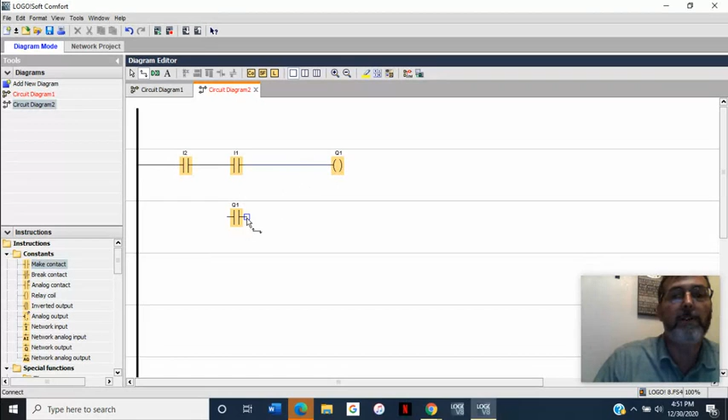All right, so let's do our connections on our wires. We connect it to our hot rail, connect it to our start push button, and then we connect it to our output. And this one down here, we've got to go all the way over here to the right before it'll connect, and then all the way back to the left before it'll connect.

So this is going to be our stop push button right here, our start push button right here, our seal in, which is named the same as the output, because when we energize this output, then we're going to have that alternate path. It's a little bit different than your motor controls, but you'll see what it does here in just a minute.

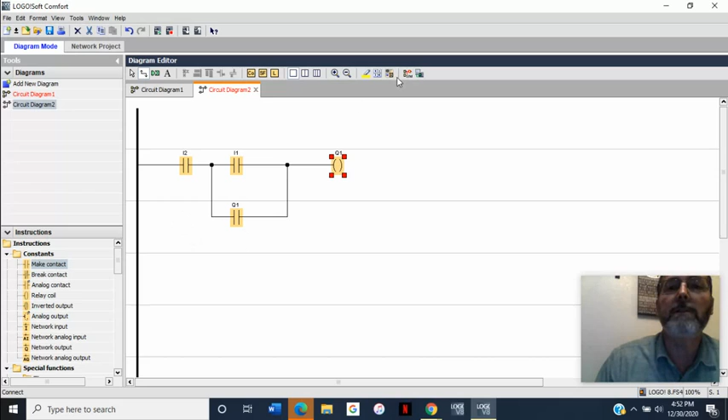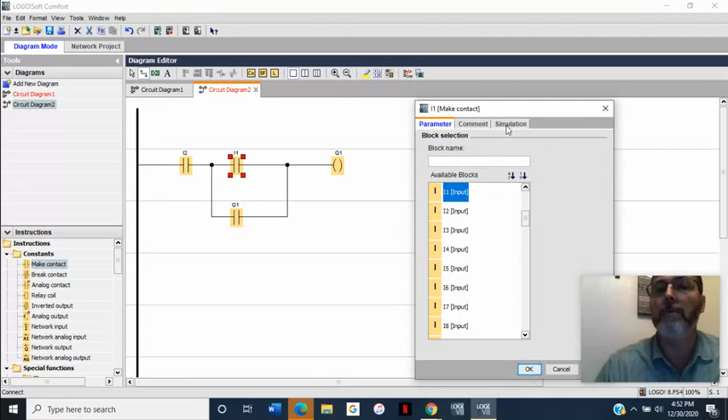I've got to right click, block properties, and on our simulation, this is going to be a momentary push button break right there because it's a stop push button. This one, right click, block properties. It's going to be a momentary push button make, and that just means it's normally open. All right.

And when I simulate it, you can see the red lines that go straight through the stop push button, and then there's nothing past there. But when I push the input 1, it starts it, and even when I release it, it keeps it sealed in because of this Q1 address right here. And we can see that our light is lit. And I push the stop push button, and it takes it out.

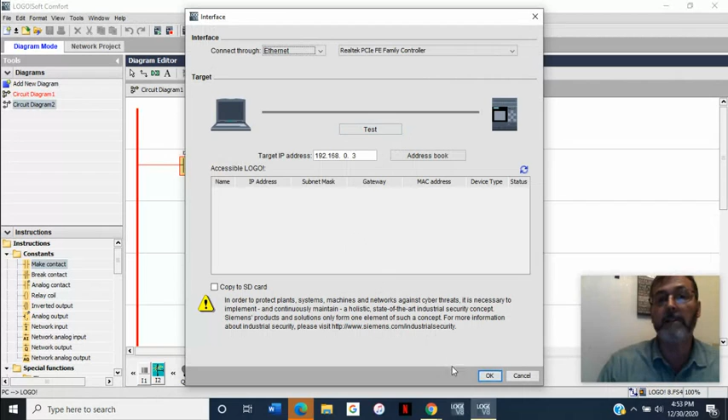I'm going to download this to our PLC. Here we go, PC download, PC to LOGO. I'm going to have to take it off simulate here. Here we go. I'm not going to test it because I already know that the IP address is correct. Click OK. It'll connect to the device.

I'm going to change it to stop mode so that it allows the program to go into the PLC. It's in stop mode. Change to run. Yes, it's already done the transfer. I forgot to turn the simulation off. I'm going to go ahead and do that. So now we've downloaded the program to the PLC.

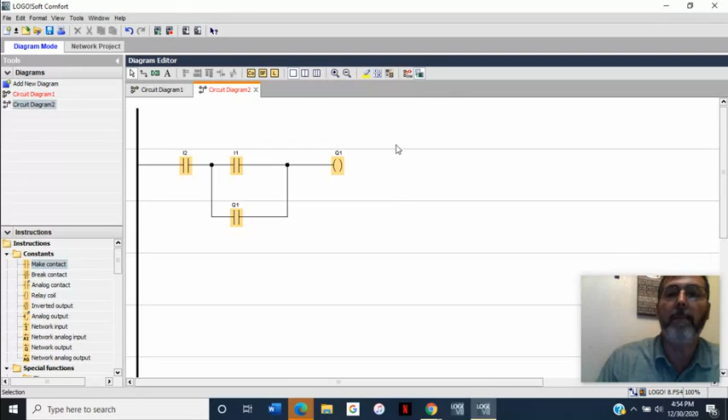Now this is that button I was telling you about before where you do an online test. You click that button right there and it'll read exactly what the PLC is doing. I already know that's the right IP address. Connect it to the device. And now we can see what actually is happening. So instead of having to simulate this, I actually push the buttons on this right here.

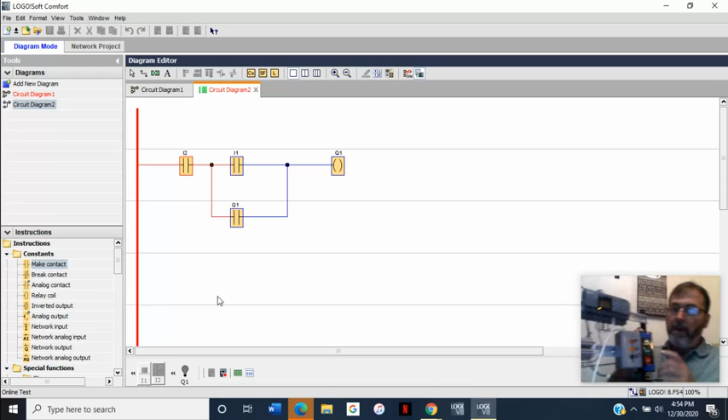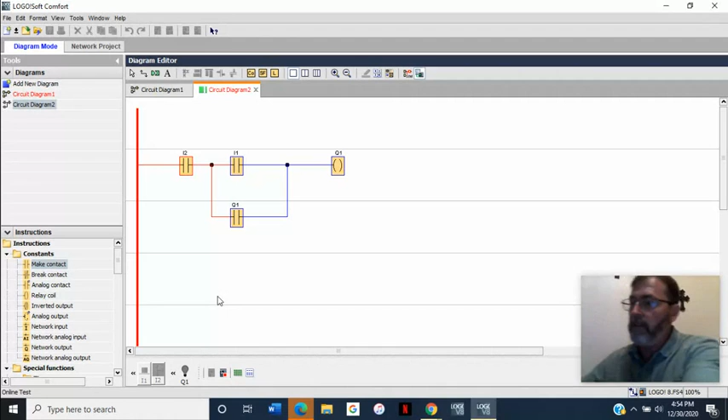Okay. Now I push the start push button and it lights up our Q1 just like it's supposed to do. And it also shows up on the screen as well. Push the stop push button and it turns it off. So not only are we doing the programming, but we're also putting it on the hardware itself, on the PLC itself. So there's some good practice for you on a seal-in circuit. Give this one a try and see how you do. That will be the end of this one.